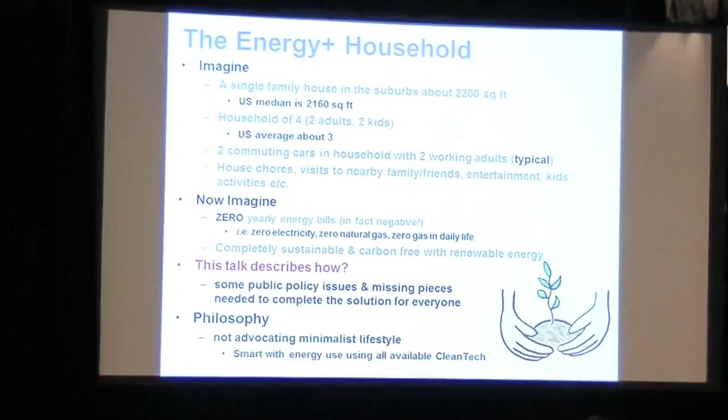Okay, so now I'll tell you exactly what the Energy Plus household is. Imagine a single family home in the suburbs, about 2,200 square feet, very close to the US median. Household of 4, 2 adults and 2 kids, again very typical. 2 commuting cars in the household, 2 working adults, nothing significant there.

And we use those cars to do household chores over the weekend, visit nearby family, friends, entertainment and kids activities, whatnot. The point about all this is that this house is a very typical US household, nothing unusual about it. And now the unusual fact about this house is that it has 0 yearly energy bills.

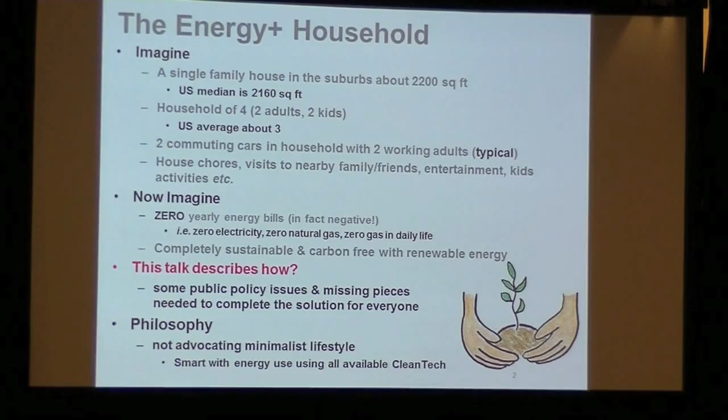In fact, negative, and I'll tell you how it can be negative. It has 0 electricity bills, 0 natural gas bills, and the household also has 0 gas bills in daily life. It's completely sustainable and carbon-free with renewable energy. I'll describe in this talk how I did it, and also some public policy issues and missing pieces which would be needed to make this solution work for everyone.

And the philosophy here is that I'm not advocating a minimalist lifestyle, because of course if you don't use any energy then you will have 0 bills. But I will be smart with energy use, using all available clean tech.

Okay, so just to avoid any confusion, the primary goal of this project is to create a sustainable and carbon neutral household. So the energy cost savings, whatever it is, is a byproduct of this project, and that was a secondary consideration. So there may be situations where I did something which probably at that point of time may not have made financial sense, but definitely made sense from the point of sustainability and carbon neutrality.

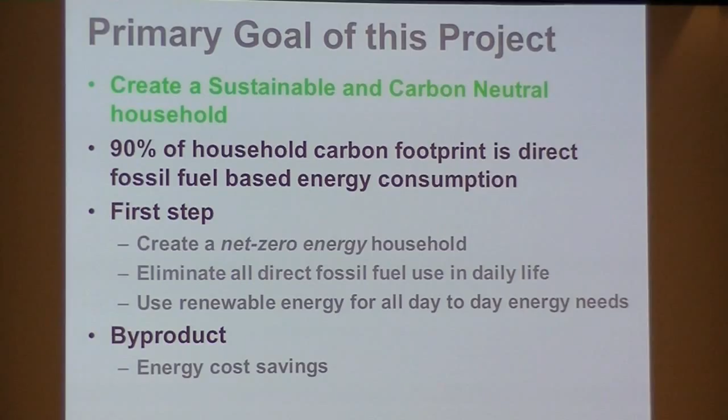So just to make that sure: 90% of the household carbon footprint right now is direct fossil fuel based energy usage. So the first step was to create a net 0 energy home, eliminate all direct fossil fuel use in daily life. The reason for daily life will be very apparent, it's the problem with current technology. And use renewable energy for all day-to-day energy use.

So this is the slide which shows the overview and outline of the whole talk. If you think about how we actually consume energy in day-to-day life, there is a component which I call the direct consumption, which you have direct control over. This is the energy that you are spending on your own, and you know what kind of energy you are spending, how to reduce it, and things like that.

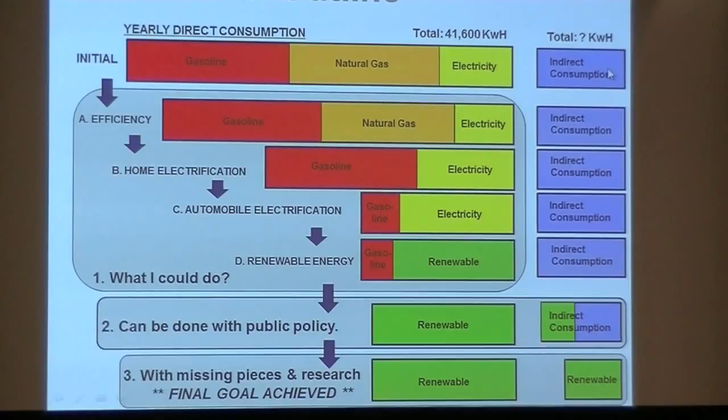And then there is a component which I call indirect consumption. For example, if you take a flight, you will be consuming volumes of energy, but you have no direct control over what kind of fuel will be burnt in the airplane and things like that.

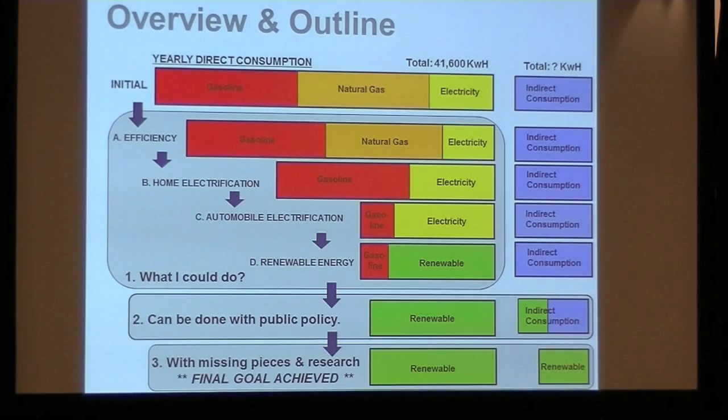So the first step that I would do is basically try to reduce and eliminate this direct energy consumption. It consists of three parts: electricity that we use in our home, natural gas, which we mostly use for heating and cooking, and gasoline in our cars. The first step would be to increase the efficiency of the home.

As a result, the electricity usage would go down, and probably the natural gas usage also will go down a little bit. One thing is, you can feel free to interrupt anytime if you have any question.

And the next step would be to electrify the whole home. As a result, all these natural gas appliances will be converted to electrical appliances. So then we have just gasoline and electricity.

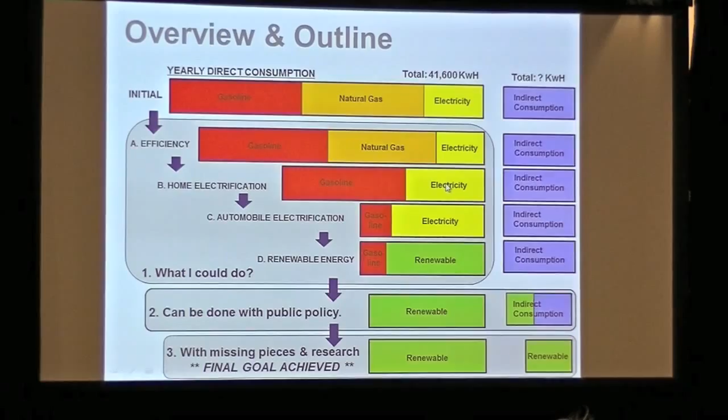And next, a step after that would be to convert all the gasoline cars to electric automobiles, EVs. So we have electricity and a little bit of gasoline, and this is basically the long drive gasoline, which still we have some issues with. It's not yet solved.

So we burn a little bit of gasoline, but not in day-to-day living. It's only when you are going on a long drive or on a vacation, and then kind of offset all that energy with renewable energy. So basically at this point of time, the preliminary goal has been achieved, that it's sustainable in day-to-day living.

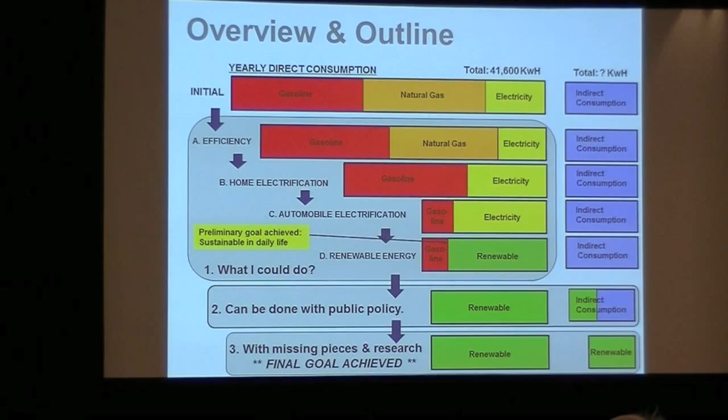And then there is a little bit which will be left, which we can actually solve right now if we have the right public policy and infrastructure. And then a little bit still left, which I call the missing pieces in research, to make everything completely sustainable. So the major part of my talk will be on this.

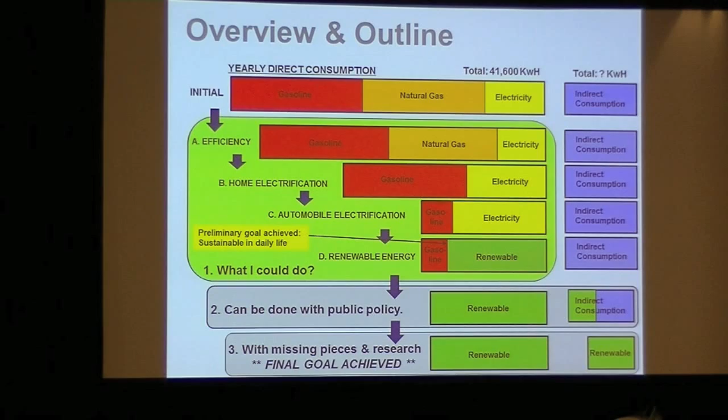What I could do to kind of make my whole energy footprint sustainable. So the first step was to do a whole house energy audit.

And you could do it using two steps. First step is to use this device, it's called a Kill-a-Watt meter. You can get it from Amazon, it's 20 bucks. Or you can actually even rent it from a library. Some of the libraries here in Silicon Valley have this.

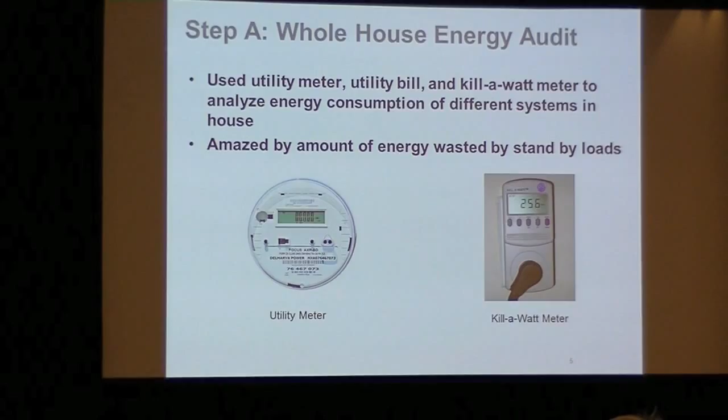What you can do is you can plug in a device over here, and this goes into your 3-pin outlet, and you run your device, and it tells you how much power that device is consuming, how many watts it's drawing. If you have a computer or some other appliance, a portable heater or something, you can immediately know how much power it's consuming.

So this is all good for appliances which you can plug into your home. But there are appliances which are directly connected to your wire, like lights over here, or this 220 volt huge appliances which do not have a 3-pin plug. So what do you do for that? The way I did it, it's a bit tedious, but it can be done.

If you have a smart meter, most people have a smart meter right now, you use the process called isolation. So you have your breaker panel, you shut off all those breakers in your home. At that point of time, your home should consume 0 electricity.

Then you identify the breaker where your appliance is, which you want to monitor. Just turn that on, and then you turn on the appliance that you want to monitor. Your smart meter should give a reading as to how much your house is consuming at that point of time, and that's exactly what that device is consuming, because everything else is shut off.

And you can isolate every device in your house like this, and you can come up with an energy footprint of all the devices in your home.

So the first step was to increase the efficiency of the home. I replaced all my lighting with LED lights. LED lights are becoming popular now. They are a little bit expensive, but the costs are coming down. I usually buy most of my lights from eBay, shipped directly from China. Though they may be a little bit less reliable, I think it's okay. So far I've had them for about 3 years, and maybe the failure rate is about 10-15%.

I think it's acceptable. So the lighting load actually went down from 900 watts with incandescent bulbs, to about 230 watts if you have CFLs, and down to 150 watts for LEDs. So they are about 1/6 the power consumption of incandescent bulbs.

Another good point about an LED bulb is that in a CFL you have a warm-up period. So when you turn on the light, it doesn't immediately start going bright. But with an LED, that problem is not there. It immediately is bright. So that is good.

Another thing is that CFLs have mercury in them, so recycling them is an issue. You can't put it in your garbage bin. You have to go to special recycling centers to put in your CFLs or fluorescent tubes. An LED doesn't have any mercury, so that issue is not there. So that's the first step.

The second step was Energy Star appliances. When I moved into the home, it didn't have any of these appliances, so I made sure that I bought Energy Star ones. They are not that much more expensive. Actually, most appliances right now are Energy Star. There are very few dishwashers which you will get which are not Energy Star, because it probably doesn't cost that much money to make a dishwasher efficient.

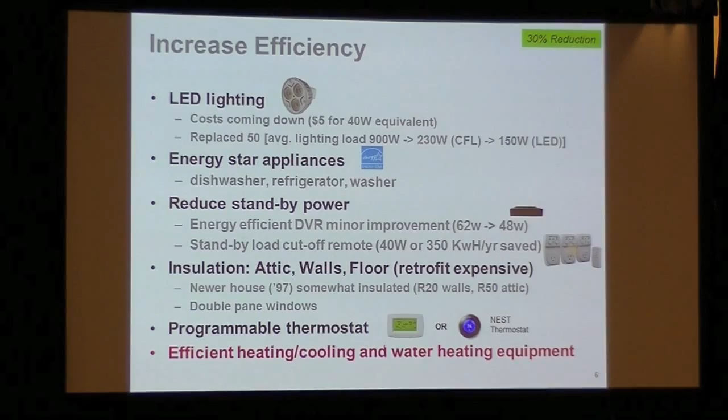And this is the thing I was talking about: reduce standby power. The highest culprit in standby power is actually the digital video recorder, or DVR. This is essentially a computer, and I don't know what design philosophy these people had in mind - the hard disk in that thing keeps on spinning 24 hours a day, 365 days a year, even if you don't use your DVR at all. It's like a desktop computer which is running all the time.

The thing is, you cannot switch it off, because you want to record your program, right? You might want to record it at 2 a.m. in the night, and you are not awake at that time to switch it on. So you have to keep running it, and it will keep consuming power. There is no way out of this. Another problem is that if you turn it off, it will take 15 minutes to boot.

So if you want to watch TV, you have to wait 15 minutes before it comes online. All these problems mean that unless people design this in a better way, there is no way out of this. So I actually looked at the various choices I have with Dish Network, and this one model actually consumed the lowest standby power, so I went for it. It reduced it somewhat, but still this is pretty big.

So the next step that I did was to use these load cutoff devices. They are actually remote switches with a kind of remote, and you can plug in all your things which draw power to that outlet over here, this one. And then you can put this remote in a central location in your home, like in a hallway or something.

So suppose you have a host of peripherals and a computer which you are using maybe 2-3 hours a day, and you switch them off, but still all of them are leaching power, which adds up to maybe 5-6 watts each. You put this to one of these terminals and then go to the remote and just switch it off, and it cuts off all of the consumption.

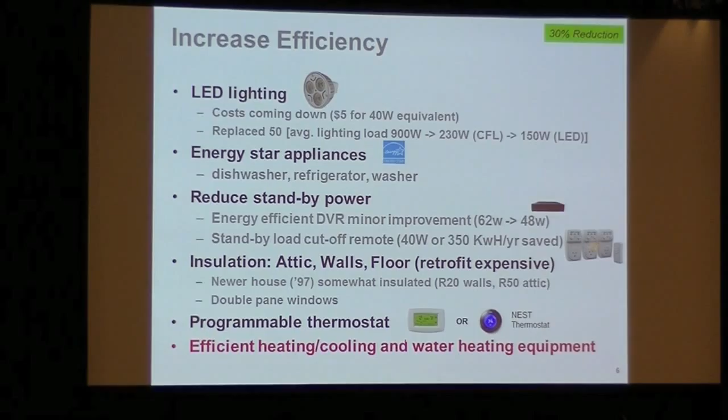Most of you already have a programmable thermostat. I use an older one from Honeywell, but you can get this new one called the Nest thermostat, made by a company here in Palo Alto. It's sometimes called the iPhone of thermostats because it looks very nice and has a Wi-Fi interface with your smartphone, so you can switch off your AC from Europe if you want. This one suffices for me, though.

And finally, efficient heating, cooling, and water heating equipment—this I put in red because it's the most important thing in terms of energy efficiency.

There are also a host of steps anyone can take: switching off lights, installing motion sensors, using full loads in the washer and dryer, using thermostat setback controls, curtains and shades, removing the garage refrigerator and freezer if possible since it draws continuous power, installing low flow faucets and shower heads to conserve water and heat, washing with cold water and high efficiency detergent, and insulating old water heaters. You don't need to insulate new water heaters since they already have insulation built in by code, but the old ones may benefit.

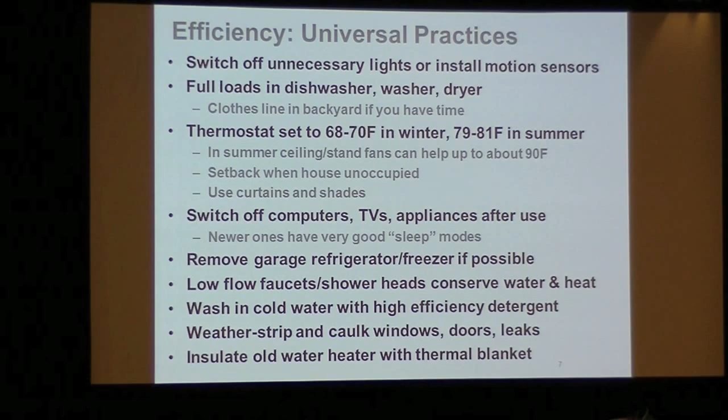The next step was to electrify the whole home. There were three appliances using natural gas: cooking, water heating, and heating and cooling. For heating and cooling, I had an AC and a gas furnace, which I converted—these tags show the money spent on each—to an air source heat pump.

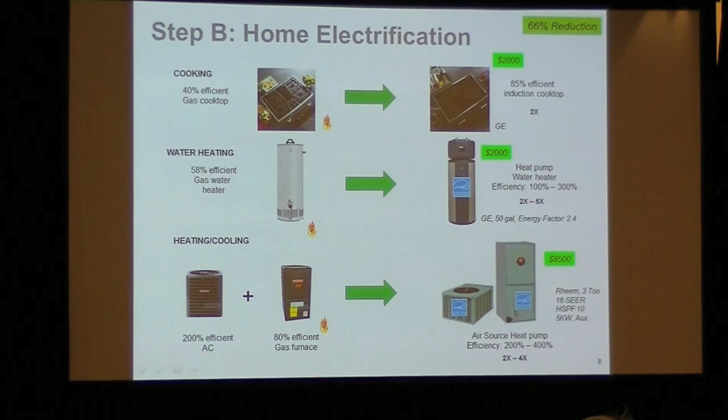The old setup was a 200% efficient AC and an 80% efficient gas furnace. The air source heat pump is actually 200 to 400% efficient. If you're wondering how something can be more than 100% efficient, bear with me, I'll come to it. As a result, you get an efficiency gain of about 2x to 4x.

Similarly, I converted the gas water heater, which was 60% efficient, to a heat pump water heater—this one is by GE, called the GeoSpring water heater, available at Lowe's right now. It's about 100 to 300% efficient, so it's a 2x to 5x efficiency gain.

Finally, I converted the gas cooktop to an induction cooktop, which was actually the most difficult step because I had a big fight with my wife over it. Well, I don't cook much, so I could understand where she was coming from.

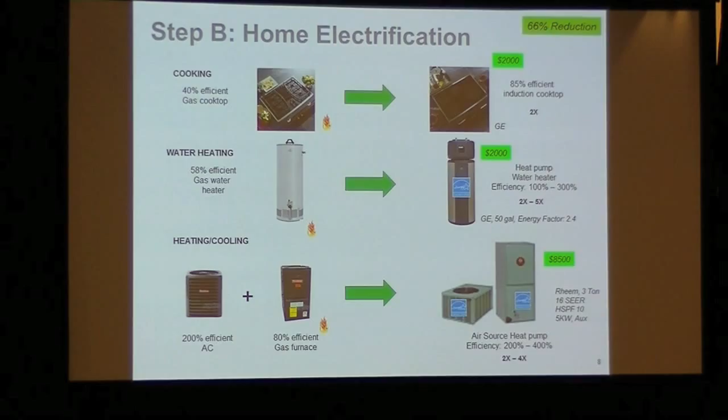The reason is that electric cooktops have a ramp up and ramp down time—when you turn it off, it doesn't immediately cool down. A gas flame, when you turn it on, gives you a 2000 Fahrenheit heat source immediately, but electric slowly ramps up and down, so when you want to modulate the heat, it doesn't modulate as well. There are some issues.

However, the induction cooktop is actually much better. We did a side-by-side comparison: I put 2 quarts of water on a gas cooktop at full heat and an induction cooktop at full heat, and the induction cooktop actually boiled it faster. Since it doesn't transfer heat conventionally but uses magnetism to induce heat at the base of the pan, the heat transfer is much faster.

So it solves most of the problems, I'd say. There is some issue with modulation, because with a flame you can visually see how low or high it is, whereas here you just have a number telling you whether it's going up or down. But other than that, it suffices most of the time. I think she's still not completely convinced, but she can live with it.

So this is the consumption pattern. It's a bit approximate because you really can't know exactly how much each portion is consuming, but you know how much each device is consuming, and you have an idea of how long you're turning on those devices every day. You add the number of hours with the device consumption to get the energy. You can also look at your meter to see how much it's going up in a day, and isolate by switching off a device for a day and things like that.

Where do you live? Because I see your summer cooling is not a lot. In Cupertino. So Bay Area is fine - that's why probably you need cooling 20 days a year or something, when we have one of those heat waves. Maybe you do, down where I live.

So in winter I had the highest consumption, okay, and as you can see, most of the consumption was heating and water heating - almost 75% of the consumption of the whole home was in these two. Then you have a little bit - lighting is almost becoming insignificant now, some electronics, some cooking, washing, drying, and still a big chunk of standby. I'll tell you why the standby is still there.

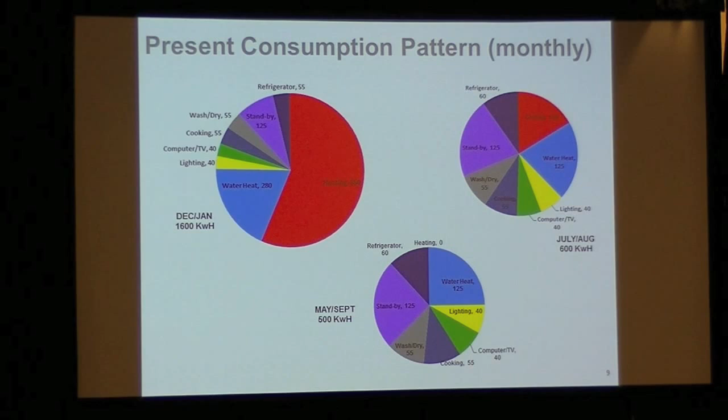In summer, we're in a mild area, so a little bit of cooling, not much. In the two months where we have neither cooling nor heating, that's the lowest consumption, 500 kilowatt hours per month. So if you look at the whole year, this is what you get.

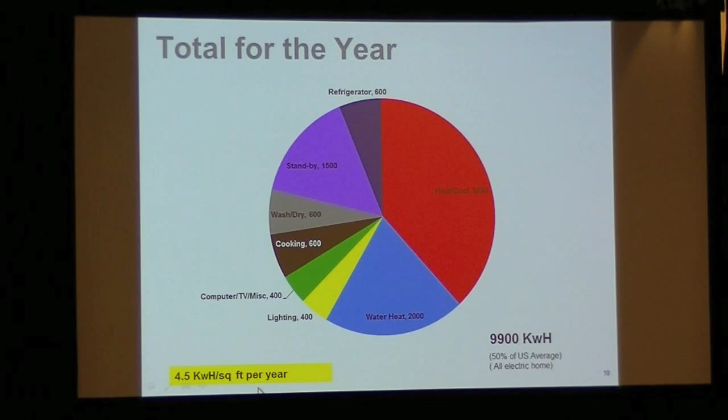If you divide this number by the square feet of my home, which is 2,200, you get 4.5 kilowatt hours per square feet per year. So that brings me to my next slide, which is kilowatt hour per square feet, which I call the MPG of your home. However, lower is better.

I have a question - the standby power you're talking about, does that include the refrigerator? Yes. So the refrigerator actually has two components: one is when the compressor turns on, and the other is a little bit of power when it's just on standby. So it's that standby power which is included, not for when the compressor runs.

So, of course, lower is better here, unlike MPG. The way you can calculate this: you add up 12 months of electricity use from your utility bills, which I call X kilowatt hours. For the electricity not offset by renewable power, you need to multiply by a grid factor - this is the primary energy divided by the end use energy. Not all the energy used to generate electricity comes to you, only about 50% does in California, so you multiply by 2 to get the primary energy, and then add up all the kilowatt hours produced by renewables, which is of course all clean.

Then you add up all your natural gas use for 12 months, which is Y therms. There's a 5% loss in CA, so you multiply by 1.05, and convert that to kilowatt hours - each therm of gas has 29.3 kilowatt hours in it. So you add them all up and divide by the square footage of your home, and you get this number, which is the kilowatt hour per square feet per year of your home.

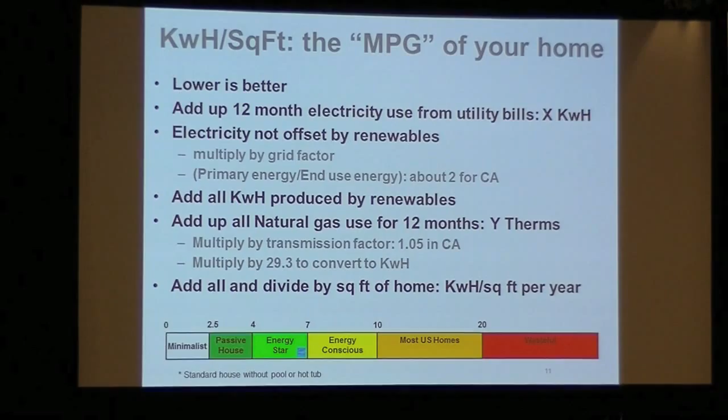So this is the energy profile of most US homes right now, and this is a standard home without a pool or a hot tub, because those are huge energy hogs, so I did not include it. And without the car, this is just the one. Okay, and so now since heating and cooling is very important, and I told you how things can be more than 100% efficient, I will explain that.

Let's visit this device called heat pumps. These are excellent devices for saving energy, and the way it works is like this: you have a place where you capture heat, and then a place where you actually pump that heat out.

So in summer, your AC is actually a heat pump. It captures heat from inside your home and pumps it outside into the warm air. So it's actually pumping heat against the gradient, using a coolant, which uses this evaporation, compression, condensation, and expansion cycle.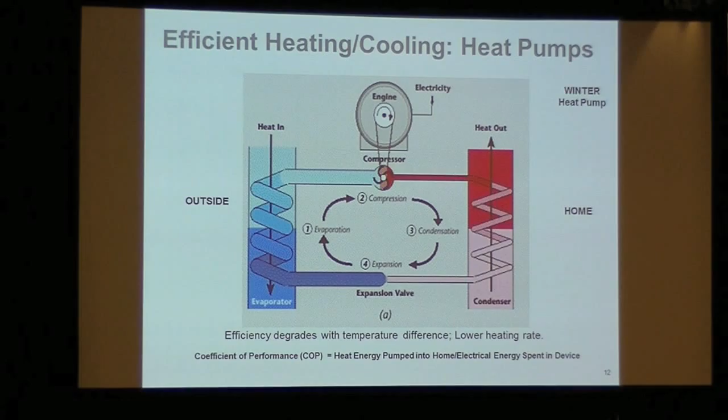The efficiency of this system degrades with the temperature difference between the outside and the inside. However, it's still quite efficient, and since it's not actually generating any heat, just pumping heat from one place to another, there is something called a coefficient of performance, which is the heat energy pumped into the home divided by the electrical energy spent in the device. This is typically more than 1, varying between 3 and 4, maybe 2 if it is inefficient, and that's how you get more than 100% efficiency.

So it's not actually more than 100% efficiency, I mean theoretically this COP can go to 10. But if you compare it with a gas device, it is more than 100%.

Yes, please. I built a house, I live at 2,000 feet up the hillside in the sun, on 2 acres, without one of course. We were on wells and septic tanks, so the thing was that if you wanted gas, you had to bring propane. And I happen to be one of those people that can smell gas in my own air and really hate it, so the house is all-electric.

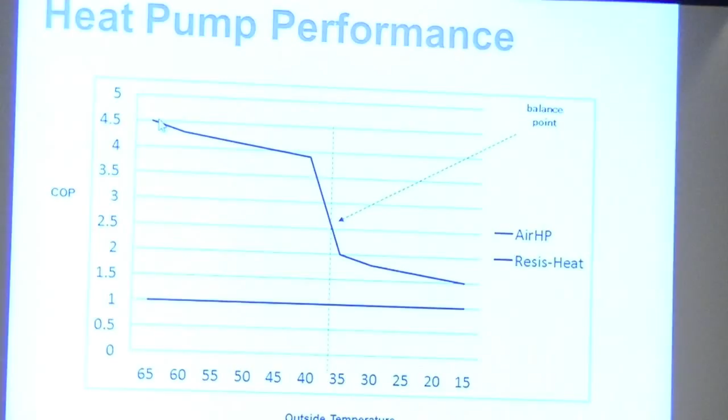So this is actually the heat pump performance. Initially, when the temperature difference is low and outside is at 65 Fahrenheit, it's almost 450% efficient, like 4.5 COP. And then as the temperature goes down, it actually reduces slowly.

Somewhere around 38 Fahrenheit, the heat pump actually cannot produce enough heat to heat the home anymore. So at this point, there are auxiliary heating strips inside the heat pump which fire, and since they are resistive heating, they're just at a COP of 100%. So the two actually average out to something like this, and this point is known as the balance point.

So the heat pump becomes quite inefficient below this, but since in the Bay Area we rarely go below 38 — maybe one month in January and December in the early morning — most of the time the heat pump is quite efficient. You can do better than this, but I think it's overkill. The average over the whole year comes to 3, so it's 300% efficient.

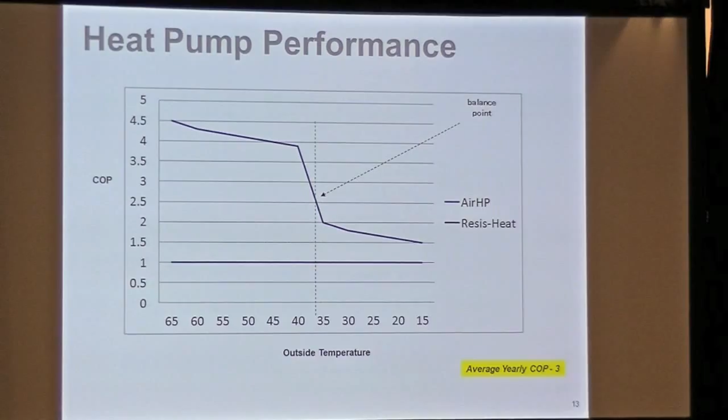What is the reason for that inflection point? Is it the coolant they're using in the loop? No, the auxiliary heating coming on is the heating facility, right? Yeah, basically it starts working harder and harder because the amount of heat needed to heat your home goes up as the temperature goes down. On the other hand, the amount of heat it can capture from outside goes down. So it has a double problem, and at some point it cannot maintain temperature.

I also heat with an air source heat pump primarily. An interesting, counterintuitive thing is that when you're heating with a heat pump, you don't want to set back too far. That's true. And that has a nice side effect: if you like things to be comfortable, you get that benefit if you don't go really cold.

My observation is, by keeping the objects in the house relatively warmer, you're more comfortable at a lower temperature than if your house is full of cold objects, and then when you want to warm up, you want the air temperature to be really warm. Whereas if the objects are relatively warm, not hot, you can be very comfortable at a much lower set point.

You mitigate that heater thing if you use a ground-based heat exchanger? Yeah, so the ground-based heat exchanger heats water using a heat pump, and if that heat pump is again an air source heat pump, then this problem can again happen. Not air source, ground-based. I'll come to that, it's like a ground source heat pump.

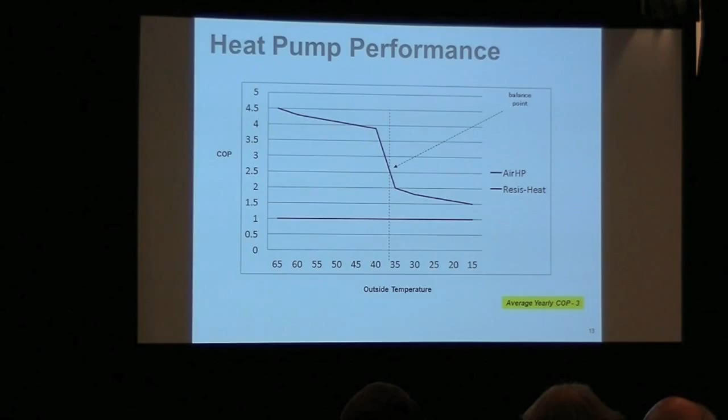Does the heat pump work well when you have a really cold area? Well, we need a ground source. Right, so this one works well if the temperature is mostly above freezing. But if the temperature goes below freezing, then you need something a little bit different. But over here it rarely goes below freezing. From 'This Old House', people who live in really cold or freezing climates use deep wells for ground source, so you have to go below the frost line. Let me come to that, I have it here.

Okay, so I go to the standby load analysis. I still have about 170 watts of standby in my home, and the reason I couldn't do anything about it is because some devices are just made to be on standby. For example, your heat pump requires the coolant to be maintained at a particular temperature and pressure, so it keeps on drawing 45 watts continuously. The DVR I talked about before, and your garage door opener - you cannot switch it off because people will be coming in and out all the time, and that sensor keeps on drawing 14 or 15 watts all the time.

There are new garage door openers that do shut down. So the ones that I do shut down are my computers, my entertainment system except the DVR - all those DVD players, receivers, and all those things. Basically 2 computers with peripherals and this entertainment system. There are also DVRs now that will actually go into full standby. Yeah, this is actually a new thing that happened.

Question, how did you get these numbers? Did you measure them? Yeah, so some of it you can use the kilowatt meter because most of them are plugged in. And if it's not, then you can use your smart meter. If you feel like something more real time, there's a company in Canada called Rolltech that makes one that goes onto every circuit, so you can actually measure real time every circuit in your house. It's pretty cool, you can see this.

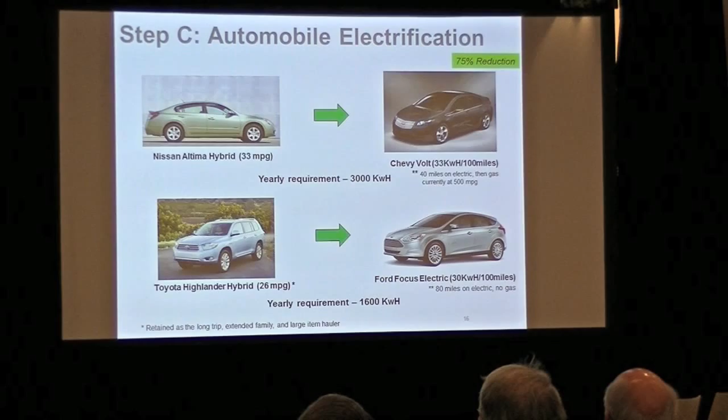If you go back—can you hit back for him? You don't go forward. If you move the mouse to the arrow at the bottom, you're now... okay, no. So there's your battery. Battery is gone. No.

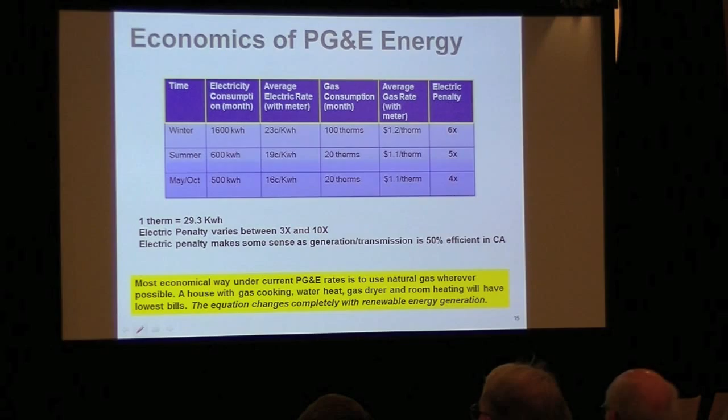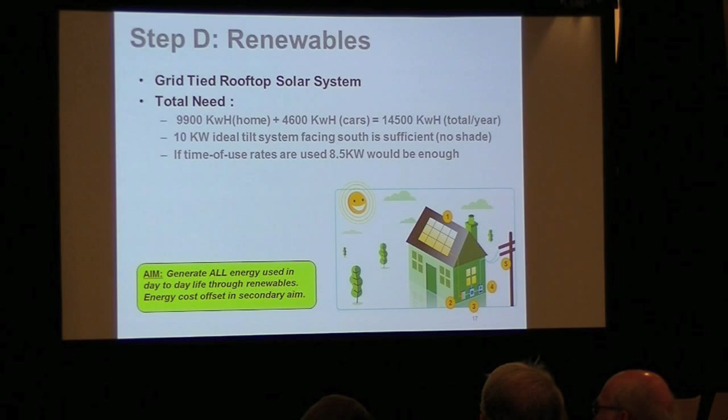A 10 kilowatt ideal tilt system with no shade should be able to generate this in Cupertino, and I did that calculation. If you use time of use rates, selling to PG&E at a higher rate when solar is producing most and taking from PG&E at a lower rate during the night, you can get away with an 8.5 kilowatt system. But my aim was to generate all the energy, not only offset the cost, so I went with the 10 kilowatt system.

The problem was that my home, even though I made sure it had a south-facing roof when I bought it, the roof actually slopes east and west for most of it. So if you put panels there, they won't really be south-facing—they're mostly east and west facing, so a bit suboptimal. That meant I needed a 12 kilowatt, almost 11.8 kilowatt system.

I put in that system in September 2011, and it was online in October. It's about 40 panels, 295 watts, monocrystalline. Monocrystalline panels are a little smaller than polycrystalline ones, and I was trying to squeeze out every single inch from my roof, so I went with monocrystalline. They're slightly more expensive too, but not by much.

The expected output was 16,400 kilowatt hours, about 10% higher than what I need. This was deliberate because the output degrades by about 0.5% each year, so I wanted it to generate all I needed even after 20 years. That's why I put in the extra amount.

There were some recent advances in solar energy I could take advantage of. Most people don't know it, but the costs are really, really low now—solar panels you can get for as low as 70 cents a watt. Only 3 years back they were $3 a watt, so they reduced by almost 75% over the last 3 years. For the install cost breakdown, the panel is 85 cents, the inverter is 35, so installation and the permitting process is now becoming the bottleneck—more than 50% of the cost.

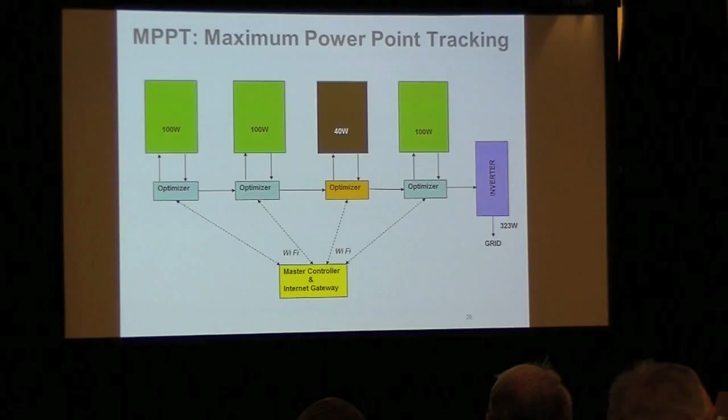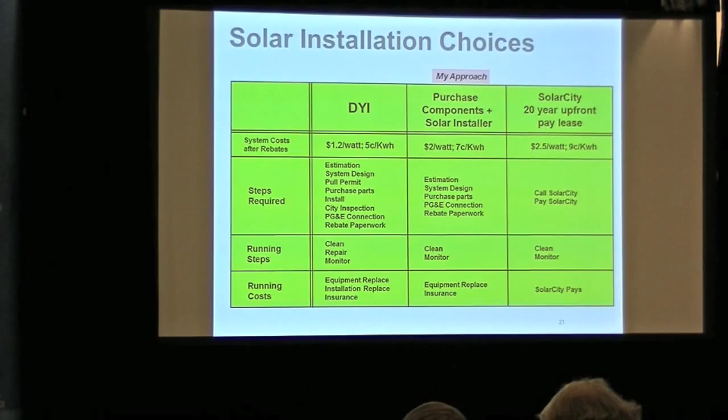So this is the year-round system performance. I projected the data a little bit because I bought the Focus last September, so I still don't have a full year's worth of data. As you can see, red is the consumption, green is the generation, and blue is the net. In the winter months I'll be a net consumer, consuming more than I generate, and in the summer months I'll be a net generator. It should even out over the whole year.

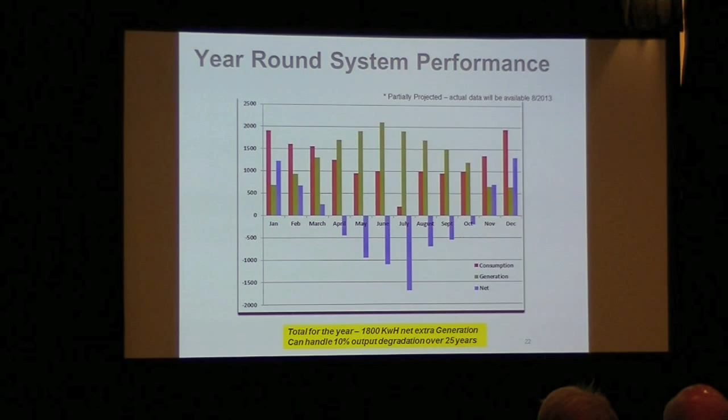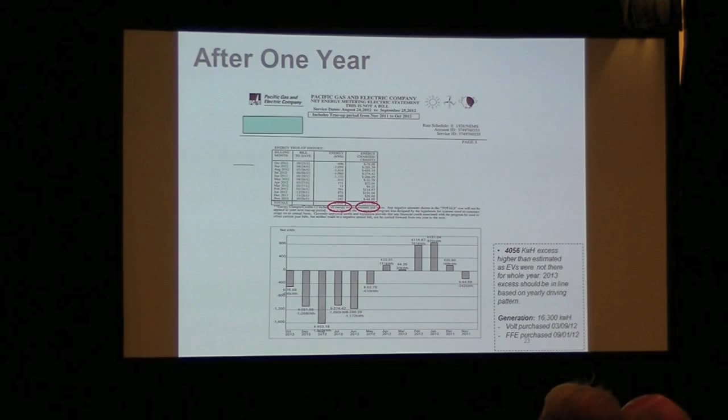And this is actually what happened. After one year, PG&E sent me this statement, showing I had 4,000 kilowatt hours of excess generation over what I consumed. Actually it's higher than my estimate because the EVs weren't there for the whole of last year; this year it should be much closer. So I had 4,000 kilowatt hours that I sold to PG&E in excess of my consumption, and so now they should give me some money, right? They gave me $122.

The reason is that PG&E only pays wholesale rates. This is the amount of money they pay their other generating customers, like a natural gas plant or something, to purchase power, like 3 to 4 cents a kilowatt hour. So if you sell them power, they'll give you money at the same rate. They would do that for anybody with a system like this, yes, anybody. This is a relatively recent change, this pricing has been in effect for about a year. But they only pay if you generate enough excess, and if you have an interconnect agreement, which everybody with solar has if they're doing that.

It's only if you have excess energy. So with time of use, you can go negative in dollars, but they won't pay you that—you have to get negative energy. The minute you become a net generator, where they do the whole year true-up, once you generate more power than you use, the rate drops to like 1.2 cents a kilowatt hour that they pay you, versus the time of use rates. Still, it's better than paying them.

The time-of-use factor only helps you when you're balancing around the zero point, right? Especially in summer, it's 80 cents.

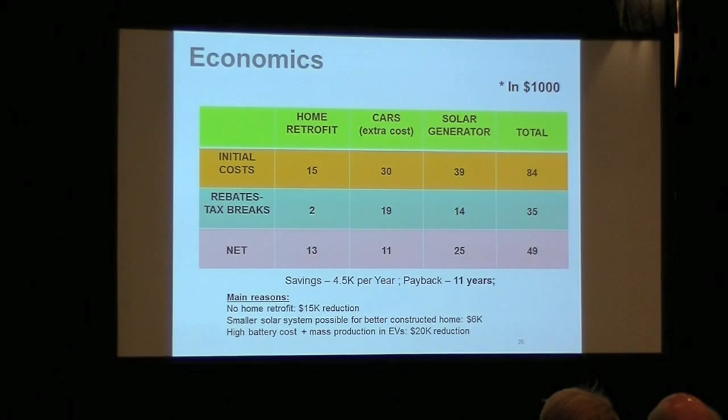I paid—these are all in thousands—15,000 for retrofitting my home, 30,000 extra for the car, after subtracting the cost of an equivalent gasoline car, and 39,000 for the solar, totaling 84,000. After getting all the rebates at each step, the net was 49,000, and as a result it saves about $4,500 right now in gasoline and utility costs. So the payback is 11 years.

But this was done in 2011. In 2013, it's gone down even further—right now you can buy 2 Nissan Leafs with no extra cost versus gas cars. It's zero. And the solar cost went down a bit more too. So right now the payback is about 8 years, and the rate of return is 10%, which is really good. I think it's just going to keep improving with time.

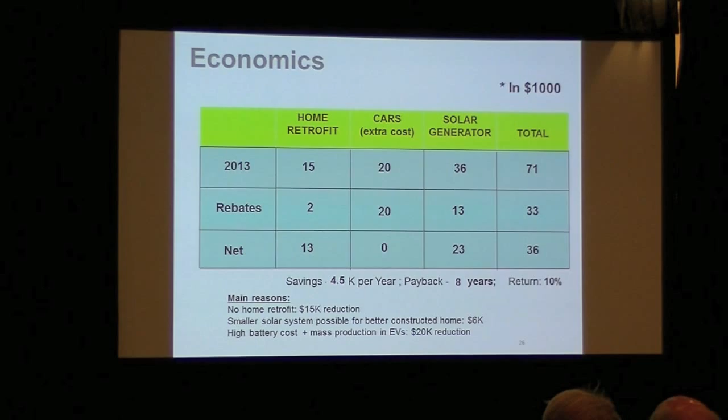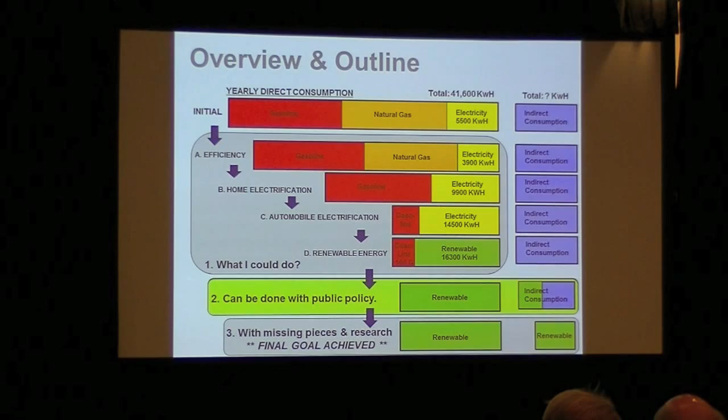So this completes this section. I'll go through the next part a bit quickly—what we can do better right now with public policy. I did a lot of research on efficiency, and did a lot of efficiency work in my home, but you can go even lower. So the question is, how low can you go?

There's something called a passive house, and a few are coming up here in the Bay Area—I saw one in Palo Alto. It's a standard out of Germany where the heating requirement needs to be about 1 watt per square foot peak. This is a really stringent requirement, because imagine a 2000 square foot home—your peak heating load is 2000 watts, basically the heat from a hairdryer. That's what you need to achieve, so it requires a very tight envelope.

It insulates like hell at the bottom, sides, and top. Use triple pane windows, use a heat—yeah, even quadruple pane in Germany. It's getting crazy.

And it has heat recovery ventilation. If you have such a tight envelope, your house won't vent any air outside, so the air becomes stale inside the home. You need extra ventilation to periodically pump air out, but if you pump air out, you also lose the heat in that air. So this ventilator actually recaptures that heat before pumping the air out, and puts the heat back in your home.

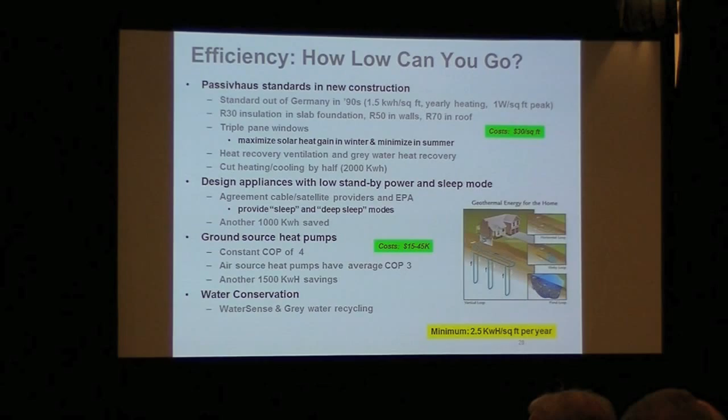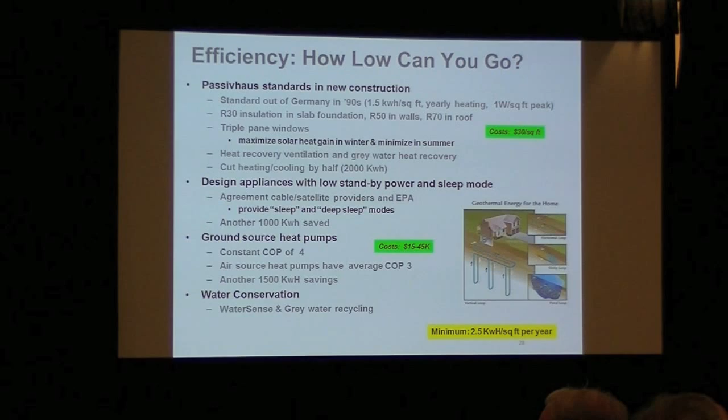Taking some lessons learned from a passive house, you don't have to go with a new home - you can just tighten up. In fact, some of the lowest cost things are to just tighten up your home before insulation. The little leaks, every place your pipes go through your roof, can be sealed, and even your vents can lose up to 30% of the energy out of them. So even an existing home, not going completely electric, should look at tightening up the envelope to save money and energy.

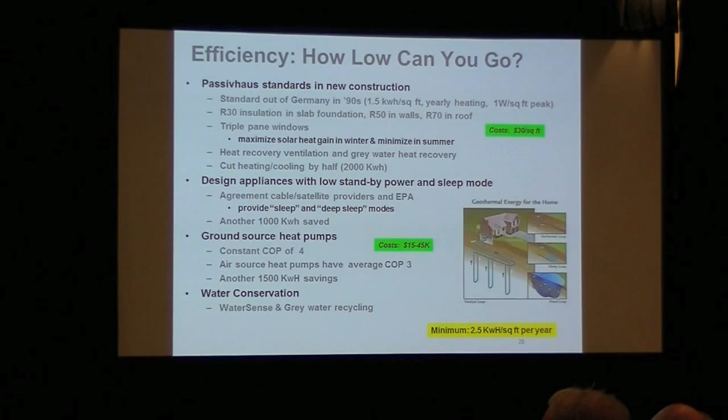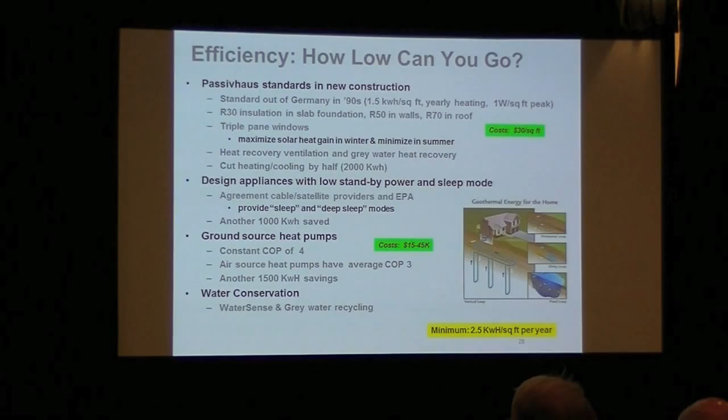Does the installation of the ground source heat pump get included in that 45K? It seems like the installation will involve taking up a lot. Yes, that's why it's quite expensive. There is a 30% federal rebate, but even after that, the cost is still significant.

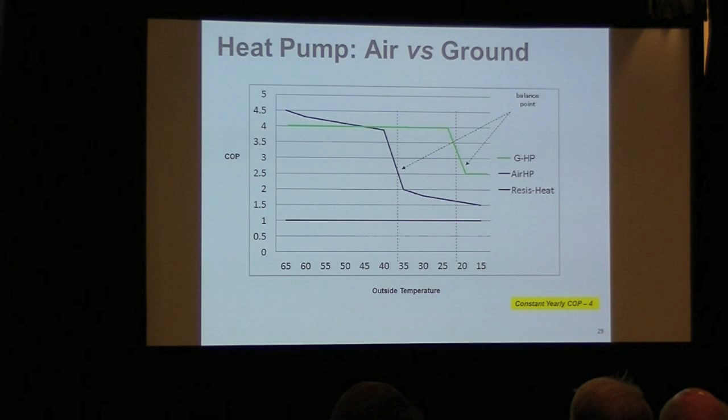Does the ground source need to be a certain depth? Yes, it does.

Here you are probably looking at a vertical loop, but there's also the horizontal loop. Horizontal loops are much lower, so you can do cut and cover, but they require a lot of area, and most people here don't have that much back yard. So horizontal loops are cheaper because you don't need to drill, but vertical loops can go as low as 100 feet.

Has anyone hit oil while drilling?

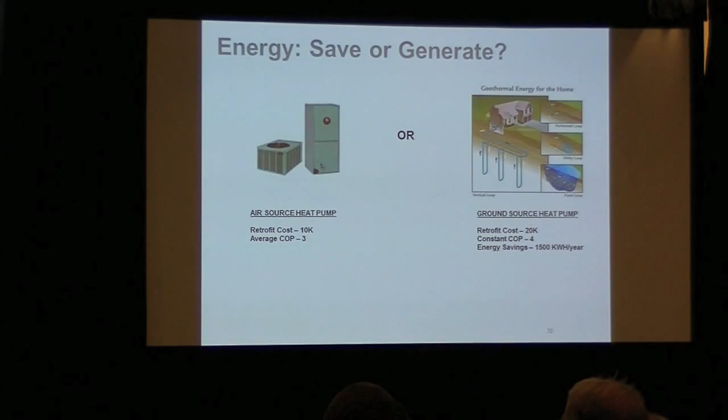So the point is, you come up with questions like should I save energy or generate energy? Usually it's a good idea to save, but in situations where a ground source heat pump saves you 1,500 kilowatt hours but costs 10K more than an air source heat pump, and adding a solar panel generates 1,500 kilowatt hours at a cost below the ground source heat pump difference, it's not always prudent to just go for efficiency. The optimal cost point may be somewhere that's not as efficient.

It may be a good idea if you have new construction where costs are lower, or if you have more severe winter conditions like outside New York or Minnesota.

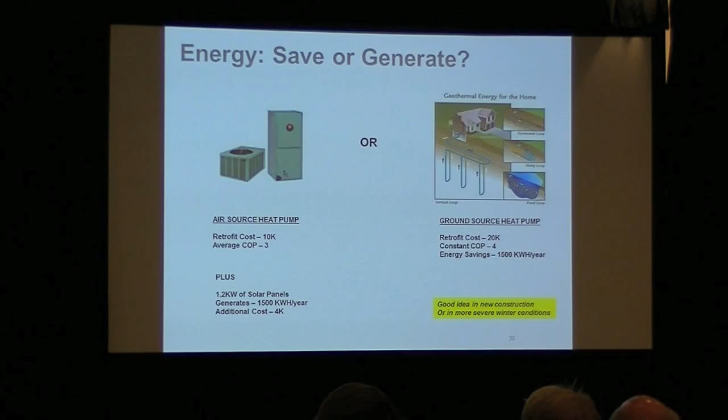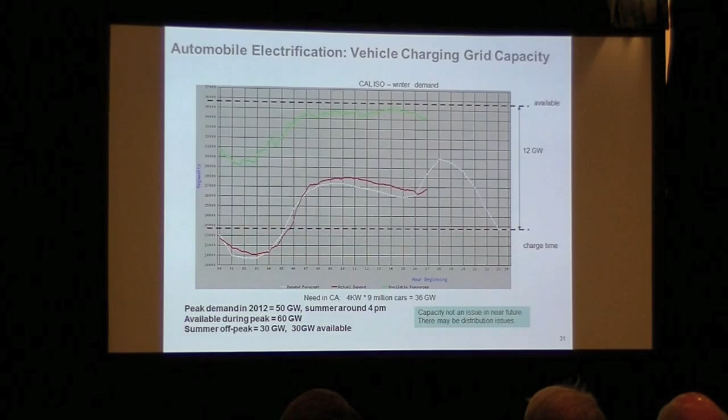Question: is this a sum of what's generated in California or what California is purchasing? It's what California is consuming, a combination of purchased and generated. There's a good Department of Energy website where you put in a zip code and it will tell you - it varies from utility to utility. Palo Alto right now is completely renewable because they purchase all their power from renewable sources. PG&E is one of the greener ones, but there is some natural gas.

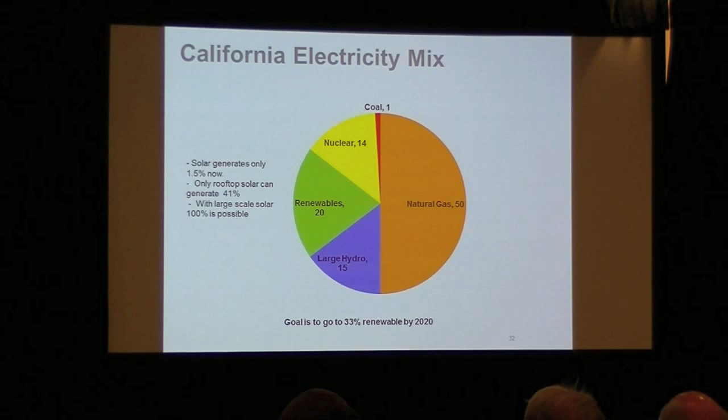So when you say rooftop solar, are you including commercial buildings and residential buildings? Yes, everything. Everything.

So the other thing is long trips - what we can do right now to take care of them. The battery technology right now is not cheap or mature enough to handle trips greater than 150 miles. Though the Model S can go 260 miles, most people cannot afford that. So our family will use 100 gallons of gas per year for longer trips and vacations.

This is one solution we can use right now for long trips: the flex fuel plug-in hybrid. Make the engine inside the car flex fuel so it can run on ethanol as well as gas. We don't have enough ethanol in the US to run everything on it, but if you run just 20% of the travel, which will happen with a plug-in hybrid, then probably we have enough ethanol.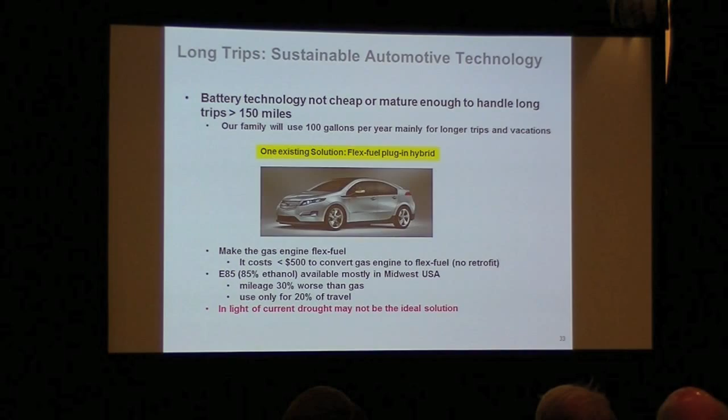But there's still some problem because we recently had a drought, and most ethanol is made from corn, so there's this issue of food competing with energy, and we don't want to get into that debate here. So maybe not a very good solution, but it can be done. If you can produce ethanol from cellulose, like wood chips or something, we may be able to avoid that.

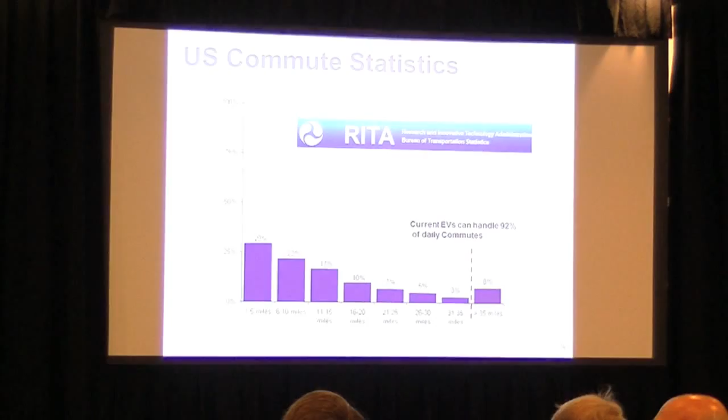This is the US commute statistics, and it shows that 92% of our commutes can be handled by current EVs. So only a little bit is left.

There are other solutions you can use, like hydrogen fuel cells. There's a car, mostly in Southern California, that Honda leases out, which can run on hydrogen, but it needs the hydrogen dispensing infrastructure. You can also have battery swapping, where you have a fully charged battery and swap it out

in the middle of the freeway when the battery runs low. Better Place is the company advocating this, but it's run into all sorts of problems. There's currently just one car in the market, in Europe, the Renault Fluence Z.E., which has this capability, and just last week I think Nissan announced they are not going to produce this car anymore. Which means I don't know how Better Place's business model will survive in the long run.

Finally, I think this is more promising: the quick charging of large batteries. Currently, when you pump gas, you pump at the rate of 30 miles a minute. I think if we charge a battery at 12 miles a minute, it's acceptable, because we'd only need to do it on the interstate or something like that.

And we need denser, lower cost batteries for that. There's a company called Envia which claimed it had a breakthrough, but that was last February, and since then I've heard nothing. So these are all the current quick charging technologies out there.

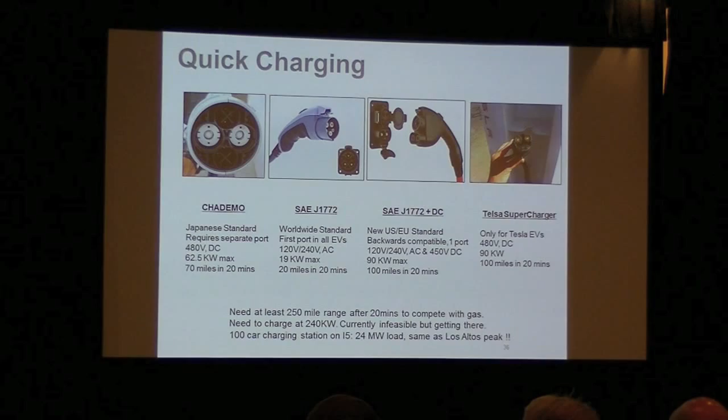One other thing I didn't mention is that efficiency also plays a role here. At current efficiency, you need to charge at 240 kilowatts. But suppose you increase your EV efficiency by 30%, which I don't think is so difficult - reduce your aerodynamic drag, reduce the weight using carbon fiber - then you need to charge much less to go the same distance. As a result, you can probably cut it down to about 150 or 160 kilowatts, which I think is feasible.

So about the projection - how many cars do you think you would need to charge on the highway, if they were all electric? What's the percentage? I'd have to look at the number of fuel pumps there and their utilization ratio. So you'd use the current infrastructure. Yeah, that's fine. But I would think that at least 400 or 500 at a time is not unreasonable.

And I think it will, yeah. Just a question - was that without the gas subsidies or without the electric subsidies? Because there's all these hidden gas subsidies. Yeah, gas prices - just electric subsidies. Okay, but the gas subsidies... Yes, are staying. Okay, gotcha.

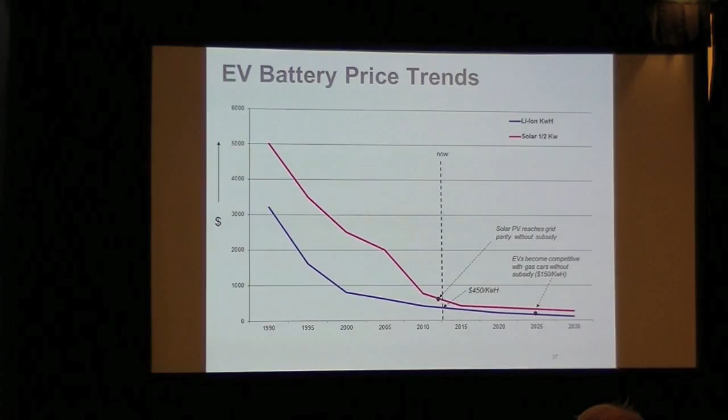So $150 per kilowatt hour, and I think it will happen in maybe another 10 years. It's getting there, but a bit slowly. And this is what happened to solar panels - sometime last year solar panels actually reached grid parity. So now it's actually cheaper to generate solar power than all the existing ways of generating energy in new plants. So I think it's getting there, but not quite there.

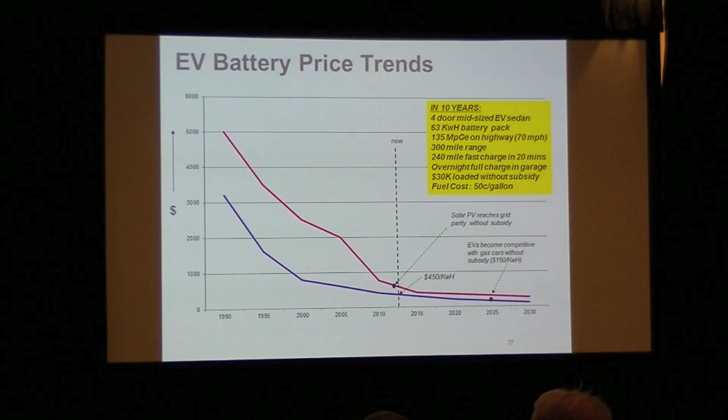And if you do the calculations for the cost with solar, it will come to about 50 cents a gallon. I hope it happens. I think the Tesla Blue Star would be the one which will come very close to this, but still 5-6 years out.

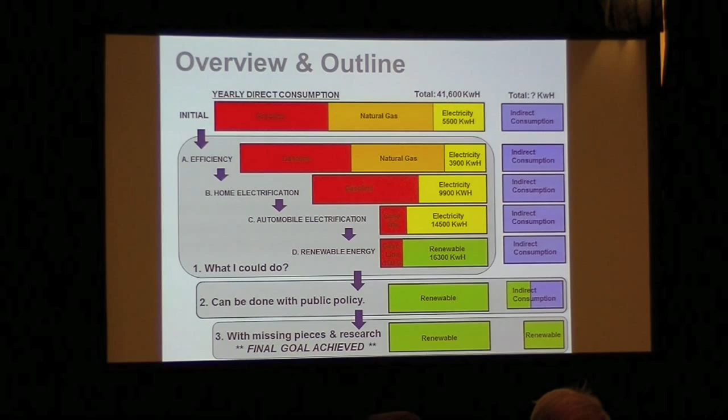So then there's the last part - the missing pieces, and I'll quickly go through this. The first missing piece, obviously, is that we need energy storage and redistribution. The reason is that Mother Nature doesn't listen to you. So you will have many times when you have tons of renewable power but nowhere to use it, and other times when you have no renewable power and tons of demand. So you have to find a way to store that energy, and right now there are two types of storage needed.

One is the daily storage - you store solar in the morning and use it during the night. I think the solutions are in sight already. One solution, especially for solar thermal, uses molten salt based storage, where they heat up salt in a container to 900 Fahrenheit, whereas initially it's about 250 Fahrenheit, and then at night use that energy to run a steam turbine to get electricity. This is being done in Europe right now, and it's quite feasible.

The other thing is pump storage, which California already does - there's a huge facility near LA where you pump water when you have excess energy to a huge reservoir, and then at night you run a hydropower plant to get that energy. But the problem is it requires a huge amount of area, because water is not very dense, so in order to get some energy you need to cover a huge amount of area with water.

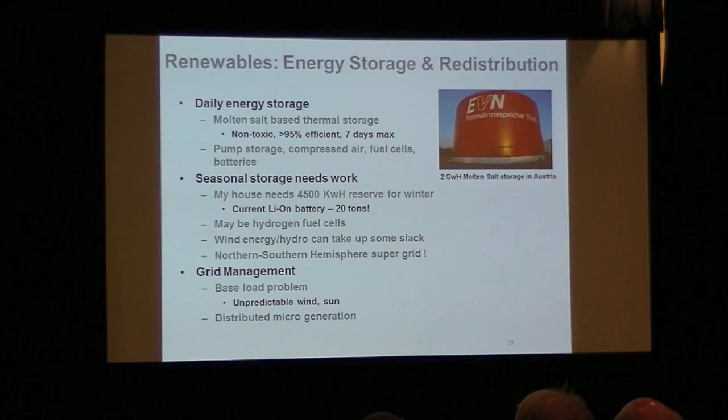And then finally, you need seasonal storage. This is the place where there's still no clear solution right now. Solar is very seasonal in nature - you have good production in summer, but maybe 1/2 or 1/3 in winter. So how to store that energy over the seasons is a problem. And finally, of course, there's the grid management, because you now have a bi-directional grid and distributed micro generation with a lot of small generating units, and so this needs to be solved.

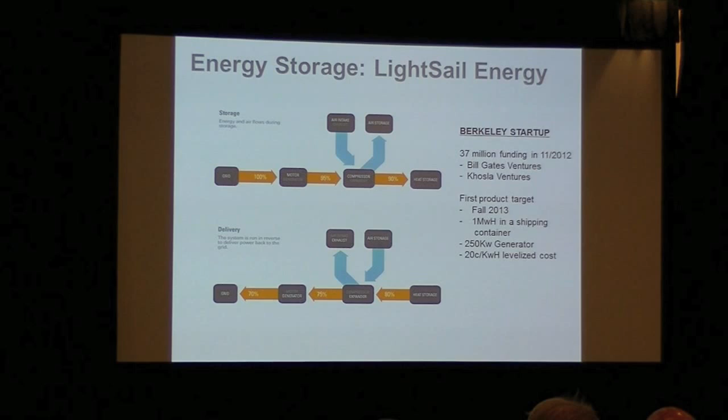This is something which needs to be done, and there's one company currently in Berkeley that has a solution they're going to sell, either this year or next year, for storing energy using compressed air. They have a shipping container kind of setup where they compress air using electricity, and when you compress air, it actually generates heat. So they have some proprietary technology for capturing that heat too. Then when you need the energy, you reverse the cycle, using the heat and pressure to give back the energy.

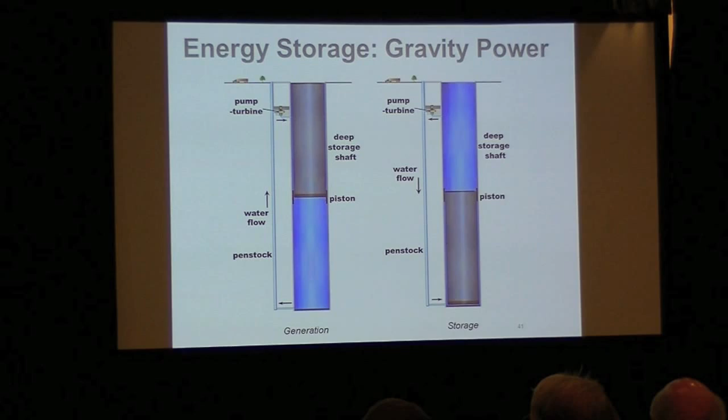There's one other crazy idea I came across called gravity power. It's similar to pump storage, but the problem is water isn't very dense. So what if you have a piston made of concrete instead, and you use hydraulics to move it up along a shaft when you have enough power? Then at night, or when you need the power, gravity pumps that energy back to the generator. This is, I think, at least 6-7 years out. There's a prototype being built right now. These guys want people who are good with shafts, and also people from mining in the company.

Finally, there's the problem with aviation, shipping, and commercial road transport fuels. How are you going to generate those fuels? There are some biofuels in the mix, but only about 5%. There's a company called Solazyme trying to generate algae-based fuel, but it's still nowhere near what's needed. How to scale these solutions, how to make them cheaper - those are the issues.

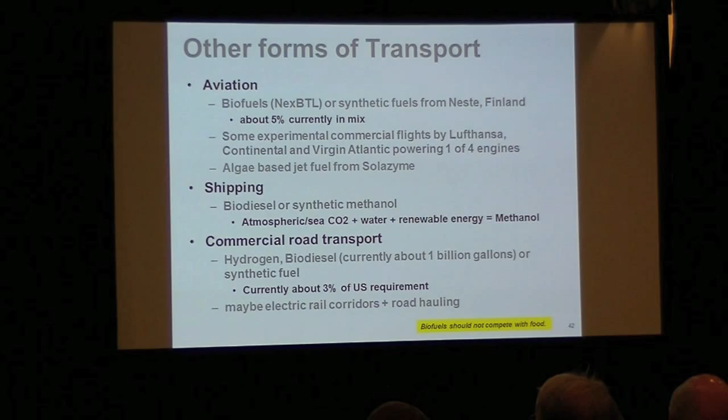For commercial road transport, we can use something like a hub and spoke model, where you have electric rail corridors for transporting, and then maybe local biodiesel-based freight for transportation. So I come to the lessons learned.

Energy saving is cost effective up to a point - it's actually cheaper to generate. Optimizing the average case gives the most value for money - I found this out again and again. Like in the Chevy Volt, you optimize your average case and use a little bit of gas. In the heat pump, your average case is very efficient, with a little auxiliary heat, which gives you the most value for money. So this is actually a good paradigm.

Rooftop solar is adequate for most US family needs. There's huge cost and energy savings if houses are designed with energy efficiency in mind. We need to design standby appliances with low power sleep modes, and this doesn't cost much time to do, like buying a mid-sized car which pays you back. End consumers can go up to a point, and we need public policy after that. We don't have all the solutions yet, but we're getting there fast.

My conclusion is that it can be done. We need basically three things: some long-term energy storage and redistribution solution, some incremental advances in battery technology and EV efficiency, and a solution for synthetic bio-based aviation and shipping fuel.

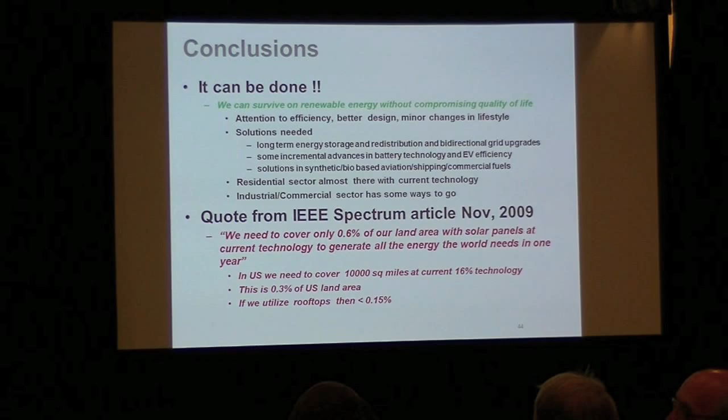That last quote you gave, I think, is from Mark Jacobson at Stanford. Yes. And almost everything you've covered here is available for anybody who wants to download it - it's a free book called WithoutHotAir.com. Yes, it's written by a Brit. It's really entertaining reading. So, there you are.

He's ahead of me. So yeah, there's this book by Amory Lovins. He's from the Rocky Mountain Institute, with 40 years experience in energy policy and technology, and he's chalked out a plan for how the US can get out of fossil fuels by 2050 - it's very nice reading that book. And then there's the WithoutHotAir website Ron mentioned, which also tells you about that.

My feeling is that this can all be done. It just requires some resolve and some public policy, and if we can get rid of the politics in it, then I think it will be much faster. Very good. Thanks for being here.